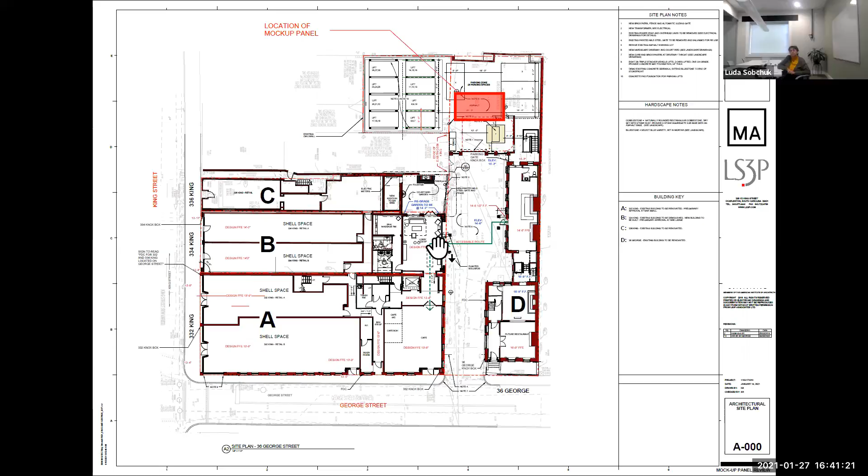I'm an architect with LS3P, speaking on behalf of the owners of the property, and yes, Mashburn Construction is the contractor that has built the mock-up. There are multiple buildings associated with this development, and we are specifically going to look at the brick facades that occur right where the cursor is, which is the back of 334 King Street. The brick also wraps around the north facade as well.

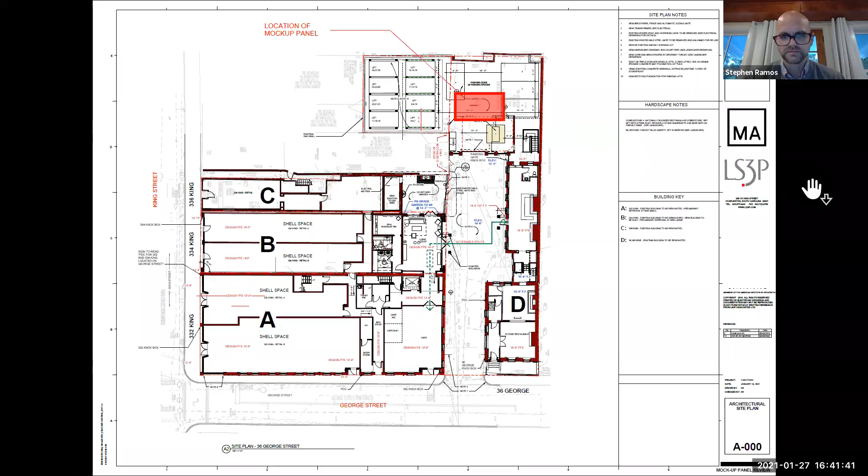The mock-up is located where that red rectangle is on this drawing. This is the segment of facade that the mock-up represents. It is a brick facade. There is a wood storefront, which is the entrance to the lobby at the ground floor, and then there are steel doors above that. Those 8 openings are actually steel Juliet balcony doors that swing into the building, and there are also mild steel railings right at those doors as well. The building on the left that you see is an existing historic building.

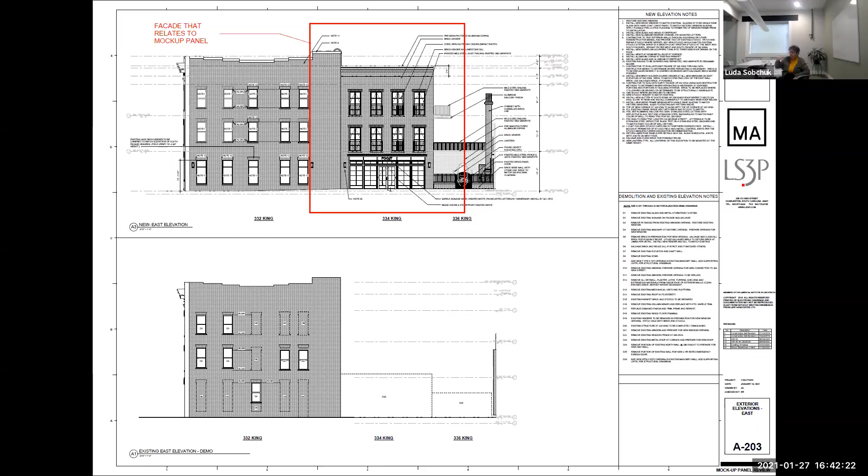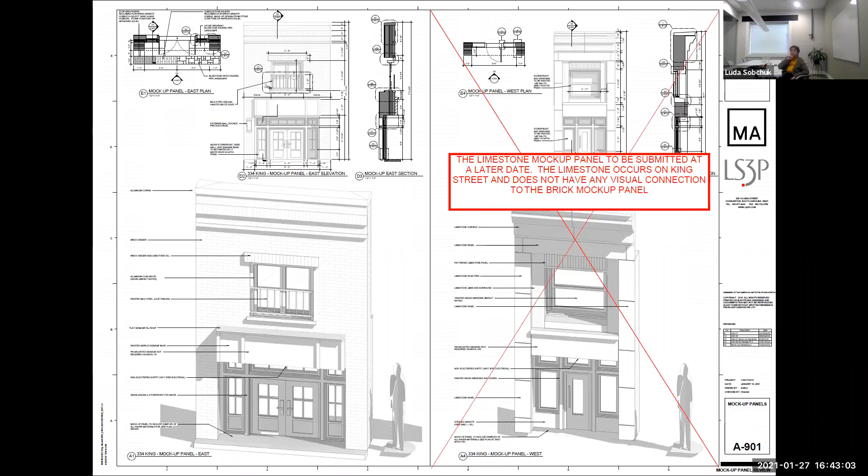You've got the detail through the parapet on the bottom left. You've also got a jamb detail at the storefront.

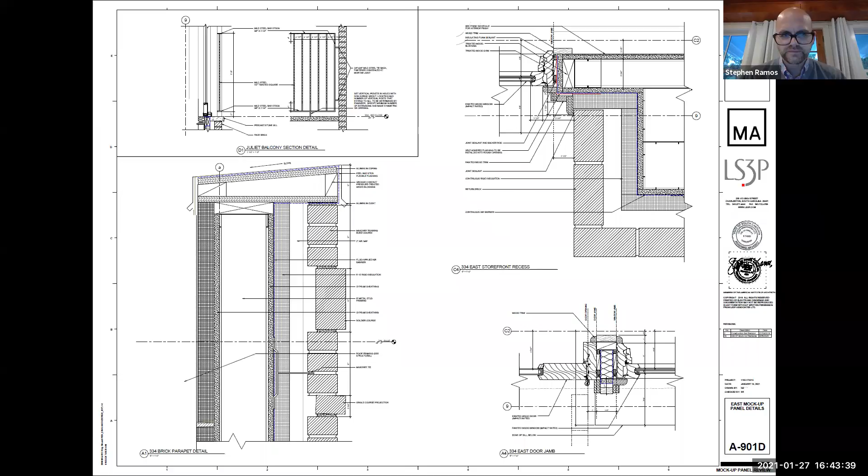Next, here's a photograph of the actual model.

Just again, brick facade. You've got a wood storefront, and then what looks like a window is actually operable doors. Believe it or not, there's an astragal right in the middle, but they are operable little doors that swing inboard. And then you've got a little copper roof right above the signage band.

I want to point out there are a couple things we are going to continue to look at. The way the railing connects, we weren't overly happy with. Right now it connects to the jamb of the brick. We're going to look at having some steel tabs that go back into the jamb of the wall to give a better surface for those railings to weld to. So that's just a little detail that we're going to take another shot at.

I wanted you guys to be aware of that. Another one is the actual signage band. Right now, this image shows it's just a flush piece of sapele that's painted. We can't get a piece that's big enough to stretch the entire length of the facade, so we've designed for there to be battens on that signage band.

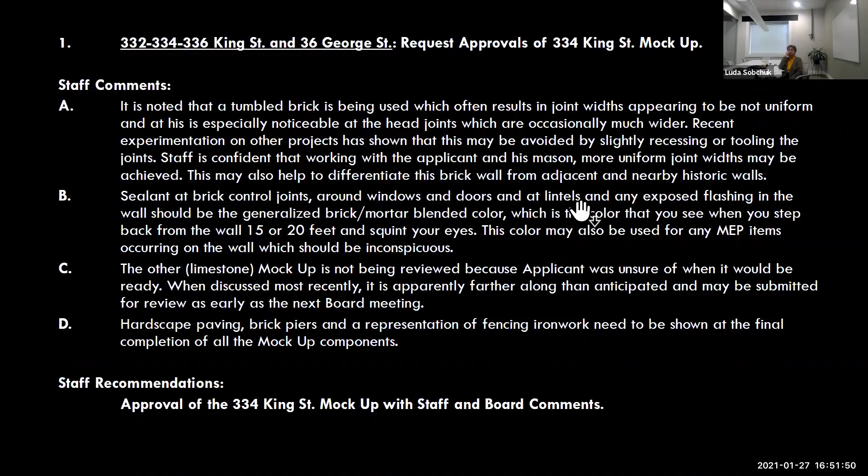Okay, thank you, Mr. Courtney. Any staff, or sorry, applicant clarification? No, that was clear, thank you. Oh okay, great. All right, board discussion or a motion?

This is Leon Scott. I'd like to make a motion for approval of the 334 King Street mock-up with staff and board comments.

Can I make a comment beforehand? Maybe because we haven't had any board comments yet. Maybe. Yeah, I think I would be on the same page with you, Leon. I just wanted to mention that the only two questions I actually had for Steve were regarding the railing and regarding the two battens that you had.

Thanks for the clarification already. It was drawn as a nice detail, the railing attachment, but it seemed to have missed the mortar joint a little bit, so your suggestion sounds good. I think it would be good to see. Generally, all the materials are of good quality and nice craftsmanship. It's generally a nice building. I thought the battens as well, if you have a horizontal batten or if those battens continue at the soffit -- I don't know how you treat the soffit. There should be a finished touch, and I like your suggestion there as well, Steve.

In terms of, I think city staff has mentioned that only a portion of the mock-up is being proposed here, and typically the board doesn't like to approve partial mock-ups, but I think in this case it is acceptable because it's two different facades, basically two different buildings. So that's all the comments I had. It looks good, thank you.

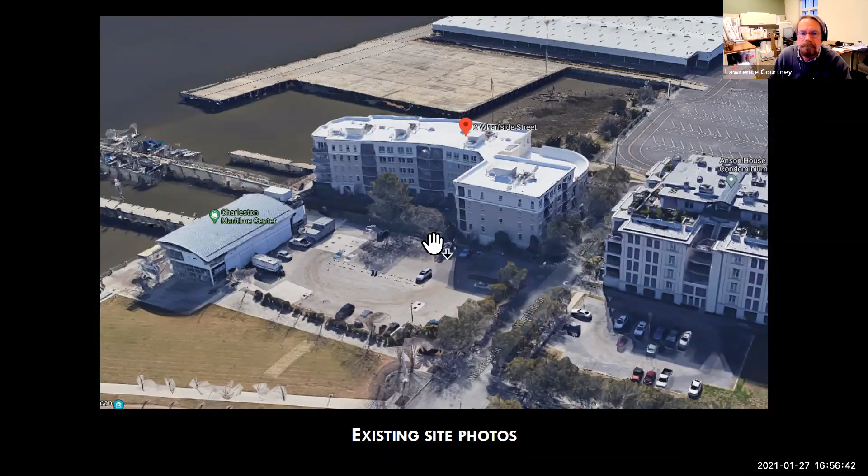Mainly where they're interested in replacing operable with inoperable windows are at stair towers around the complex, and mainly on this east facade right here on the harbor. This is a view from the north.

Board comments at final included: one board member said that they appreciated details on the plans, and one said that they don't think that the window is clunky -- if it's heavy, it will add to the substance of the building.

Staff comments at that time were that this is essentially an in-kind replacement of the project, addressing the remediation of water intrusion issues, and that care is to be taken to maintain profiles to match existing, and that the window looks very clunky in the photo, and that the applicants should seek an alternative which better matches the existing. Staff's recommendation at that time was for final approval with board and staff comments, with final review by staff.

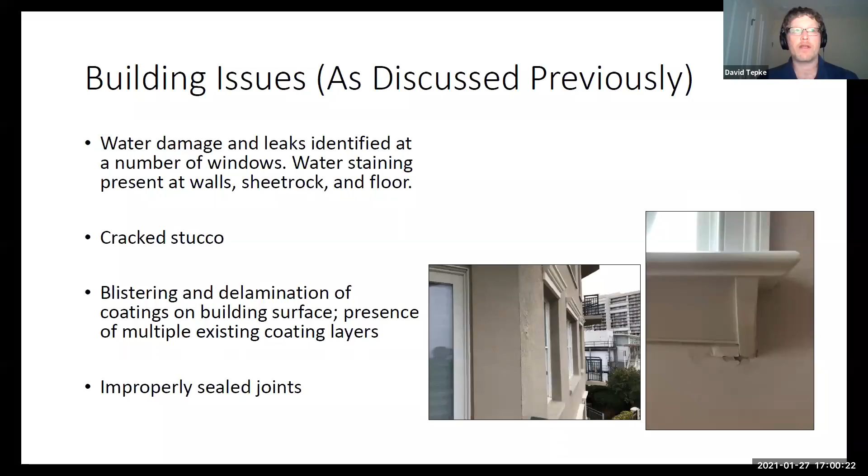to the board prior, and there was some comments regarding some trim that would make it more architecturally feasible. And so we switched to a YKK model. Skip to the next, please.

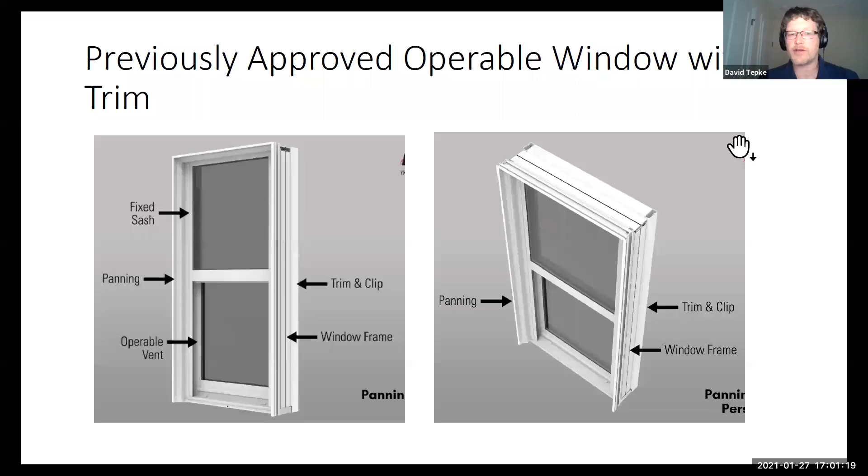And so this was the previously approved operable window at staff level with trim. And as you can notice, it's a single hung window. Skip to the next, please.

However, the subject of this request is that the owners have requested that we move to inoperable windows, as Mr. Courtney has mentioned, at essentially the stair locations and the eastern facing balconies and window walls. These are inoperable units of the same essential manufacturer with the same coatings, the same grade of window, and the data sheet has been provided as part of the presentation and the request.

Next, please. So this, as you can see, the primary difference between the inoperable and the operable window is the sight line at the center of the window, where essentially there's no offset. Next slide, please.

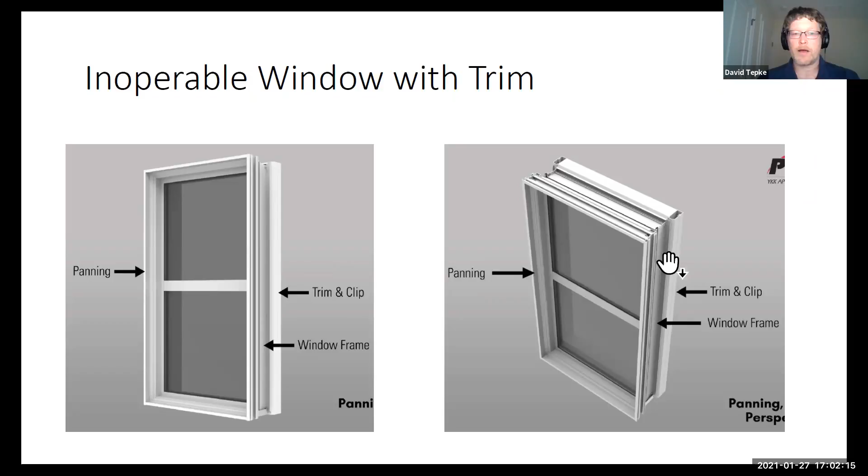The locations that this is being requested is at the stair towers, which I have highlighted there on the drawings on the left and in photo on the right. And this is on the west elevation, which is the street facing elevation.

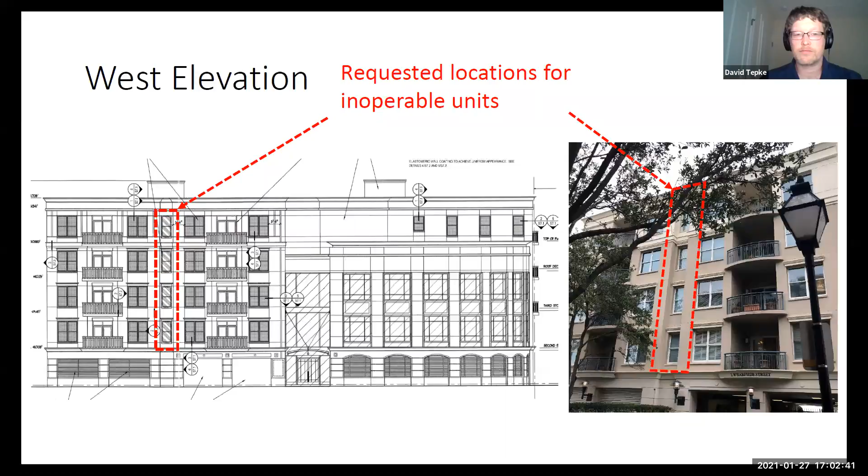Next. Next photo, please. Okay, there are no requested areas on the north elevation because there are no stairs.

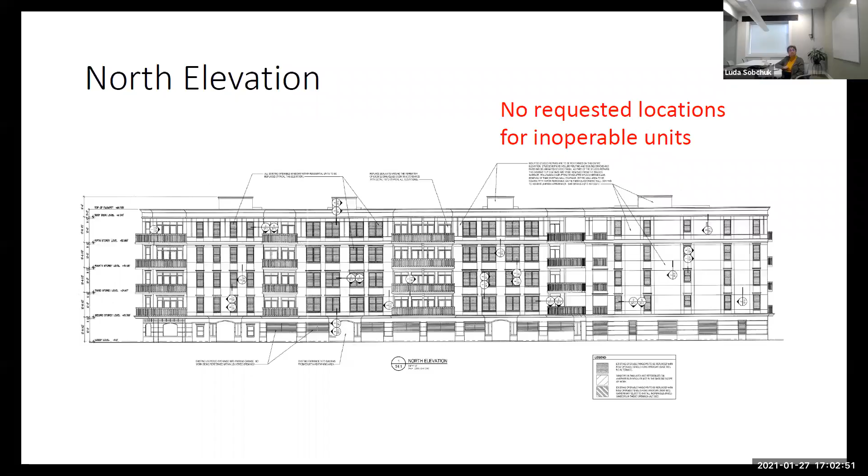Next. The south elevation has 3 locations similar to the one shown in the picture above the drawing details.

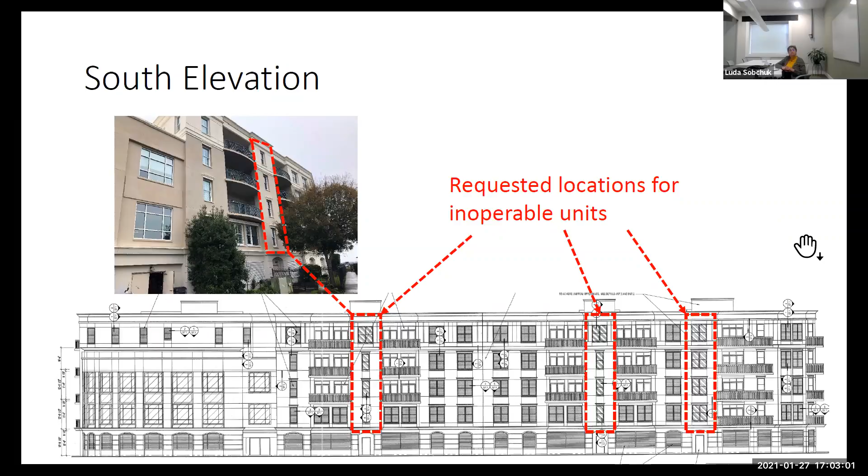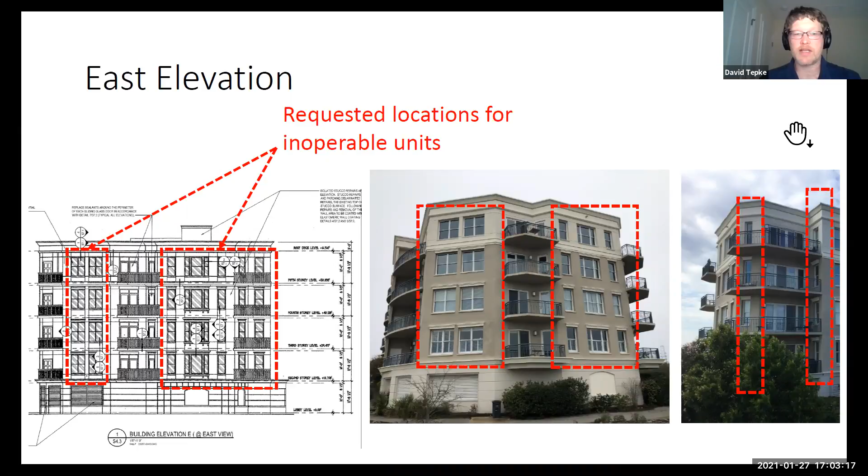Next. And then on the east face, which faces the harbor, the request is to replace the operable windows that were previously accepted and discussed and modified on staff level with the inoperable.

Thank you. Any questions from the board or staff? I have one. I was sort of curious - what predicates this request? Is it maintenance driven or financial, or what would you say?

Primarily maintenance driven. There is a desire to have essentially less operable parts, particularly on those east facing elevations closest to the harbor there. We were also able to obtain a higher performance rating on the inoperable window compared to the single hung. They have a higher overall rating, structural and water resistance, and that appealed to the owners.

Okay, I have one question. For the fixed, non-operable window that you see on the right, is that an internal divider, or is it a simulated divided light? Is it external?

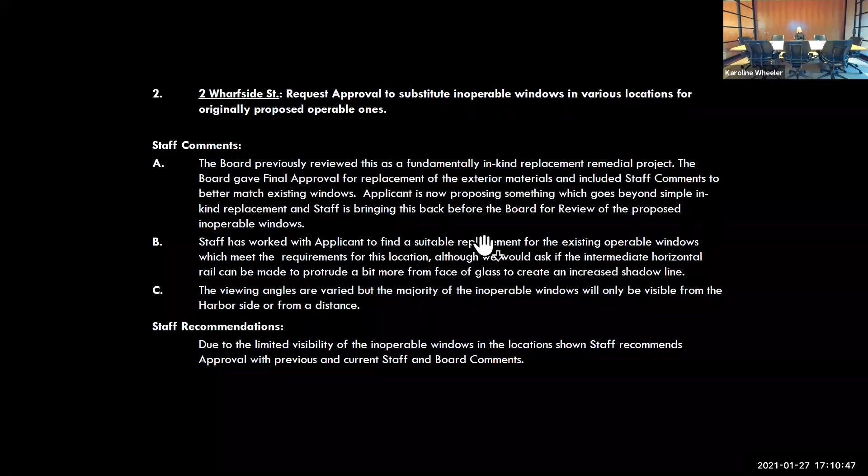Staff comments include that the board previously reviewed this as a fundamentally in-kind replacement remedial project. The board gave final approval for replacement of the exterior materials and included staff comments to better match existing windows. Applicant is now proposing something which goes beyond simple in-kind replacement, and staff is bringing this back before the board for review of the proposed inoperable windows.

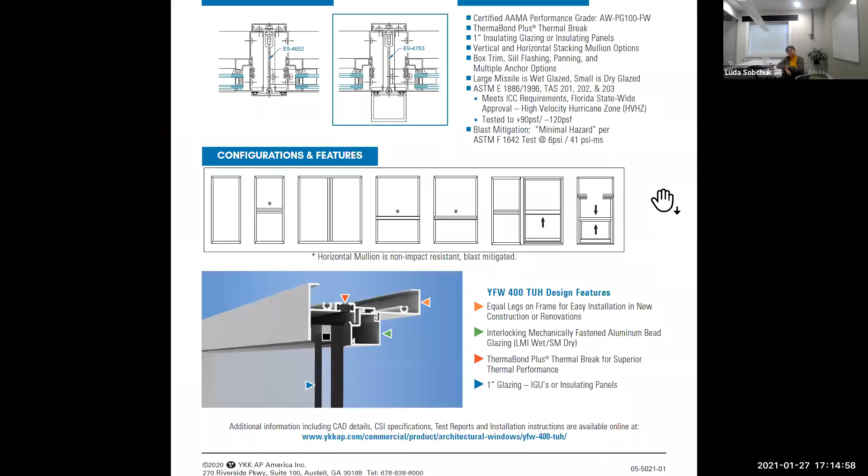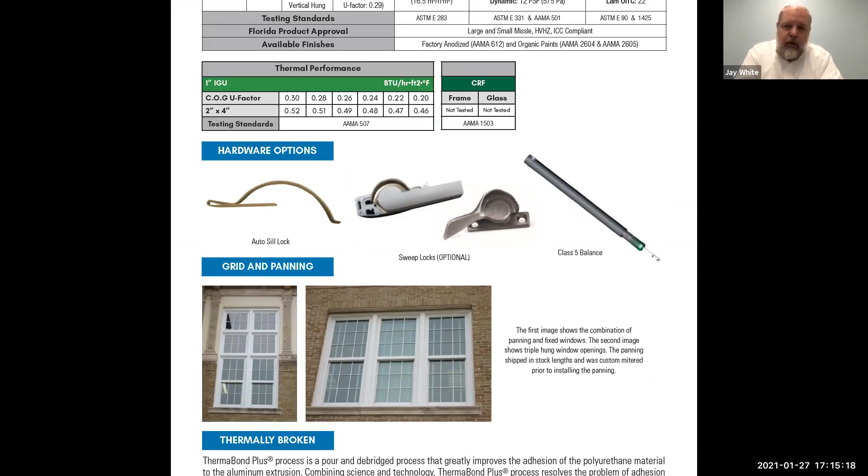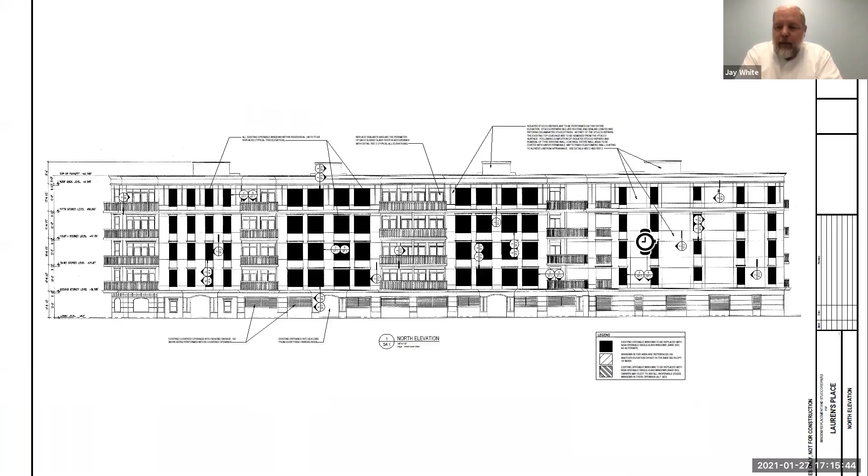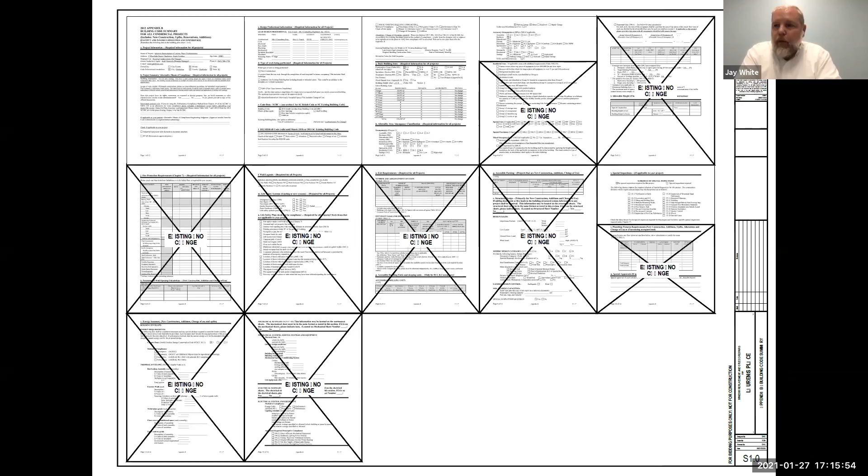Well, I can sort of lead this one off a little bit. I understand, for a homeowner to be going through such invasive surgery on their house to rectify a condition like this, I understand wanting to maximize one's investment. My only concern is that moving to a fully fixed window, whether it's a truly divided light or a simulated one, does flatten the window significantly without the offset of the sashes. And considering that you've got these two window types nearly side by side, despite the fact that most of them face the harbor, I'm a little concerned about that. Charleston has always been known for the way its buildings meet the rivers, meet the harbor, and I don't want this project to have the effect of flattening the facade even greater. So that's a concern for me.

I would think that you could improve on an already fantastic window by fixing that sash entirely, and that would especially make sense in the stairwells where there's nobody monitoring whether the windows are open or not. But I would think that the AW65 performance, if that's what the adjoining or adjacent windows are providing, then armoring this facade is not really going to protect the building as a whole. I think it has a detrimental effect on the in-kind replacement that we approved back in September.

I'll just add a little bit, I wasn't at the September meeting so this is the first time I see this. I definitely agree with you, Jay, that suddenly changing the window from one elevation to another just because it faces the harbor doesn't really make sense to me. When I looked at the elevations, the proposal of changing the window type in the stairwells would make sense because it's recessed, and there's a certain system or concept behind that. But the facade at the harbor is still visible, and I don't see a reason for that, especially if the new window would still be a high performance window.

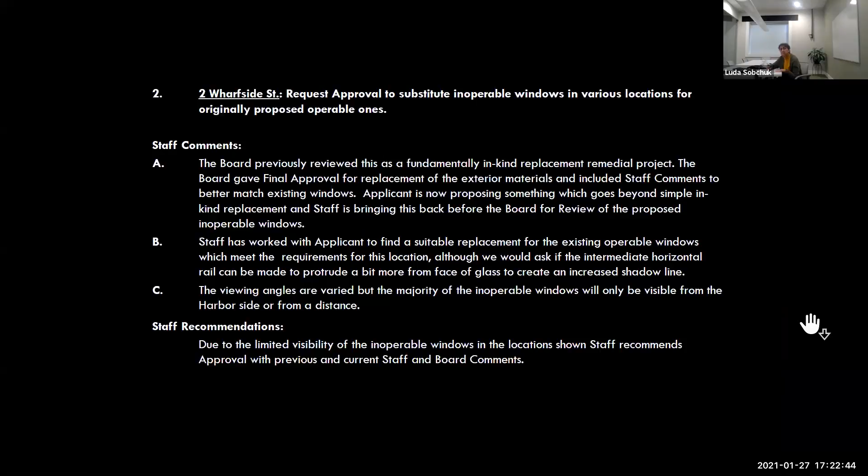The third and last item on the agenda is 20 Romney, involving 4 buildings at Foundry Point. The applicant is requesting approval to paint buildings 1, 3, 4, and 5 at the Foundry Point complex.

This is not rated, it's brand new. It's in no discernible neighborhood. It's circa last year or the year before, and it is in the historic corridor district.

It at first was known as Charleston Steel Phase 1.

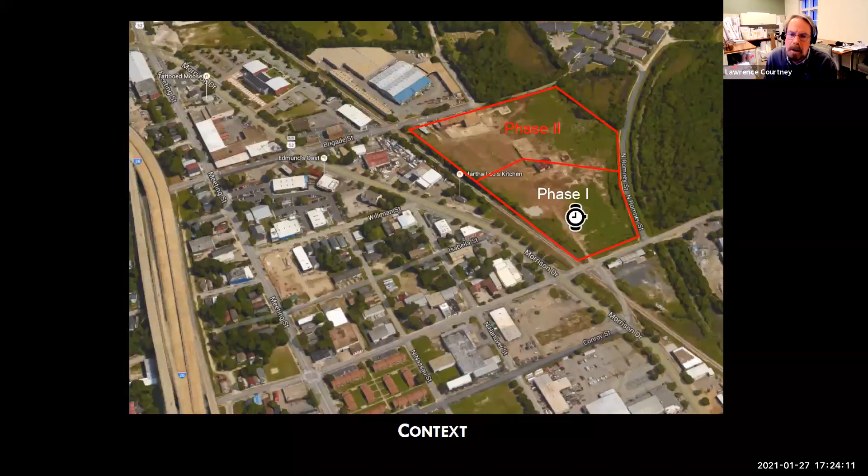And with that, I will turn it over to Mr. Monroe and his team. Lawrence asked me to have the ownership team, Middle Street Partners, Adam Monroe, and our consulting engineer, Dean Rolita, to talk a little bit about why this request is being made, and then I'll follow up with the how. So I'll turn it over to Adam.

Sounds good. Can you guys hear me? I'm not seeing myself on the Zoom here. Yes, we see you and hear you. We see you. Okay, all right. Nice ceiling fan. Yeah, I had to go hide in my house to take this.

Appreciate everyone's time and consideration of this agenda item. By way of background, this project was constructed in 2019, late 2019, through spring of 2020. I think we finished construction on the last building there on Romney Street sometime around April of 2020. And some background as to what is behind this request.

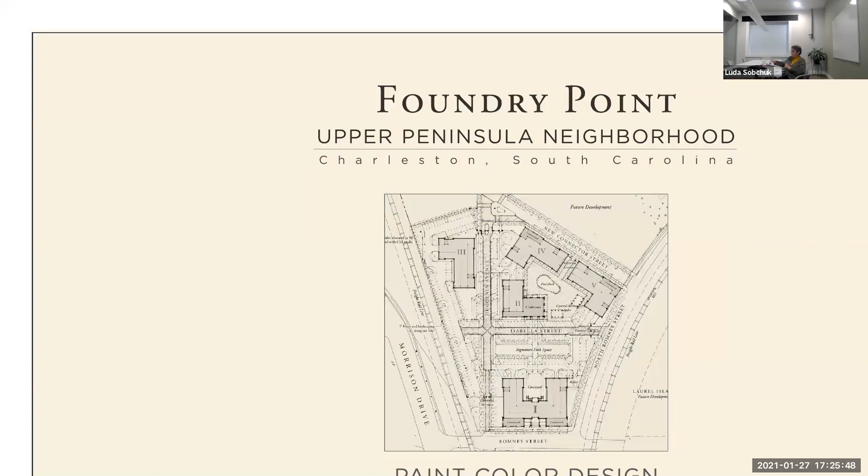In spring of last year, we became aware of some issues with the buildings related to the through-wall scuppers in the roofs having a defect. Basically, there was no welded seam along the entire run of the scuppers, which several large rain events revealed a pretty large bulk water issue for the buildings, putting a lot of bulk water down between both sides of the exterior sheathing, but really on the exterior side, between the wall and the brick.

We were lucky to find that issue quickly, determine what the remedy was, and go back and replace 30 some odd scuppers throughout the project over the course of several weeks. In doing so, we had several consultants review the remedial work and found another issue after closing the chapter on that.

Which was not a fun way to end one issue, but we did discover some things that we wanted to look at further. That being the integrity of the wall system relative to the damage sustained by these bulk water issues caused by the scuppers.

To make a long story short, we engaged a building envelope consultant who reviewed the condition that we were seeing as we put these buildings back together after the initial issue, and wanted to ensure that we had our bases covered as it relates to long-term durability and waterproofing of the wall system. So that's why we're here.

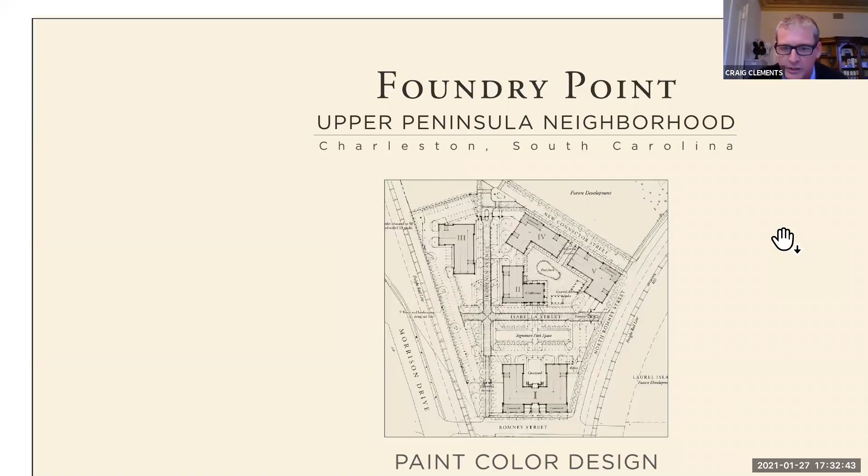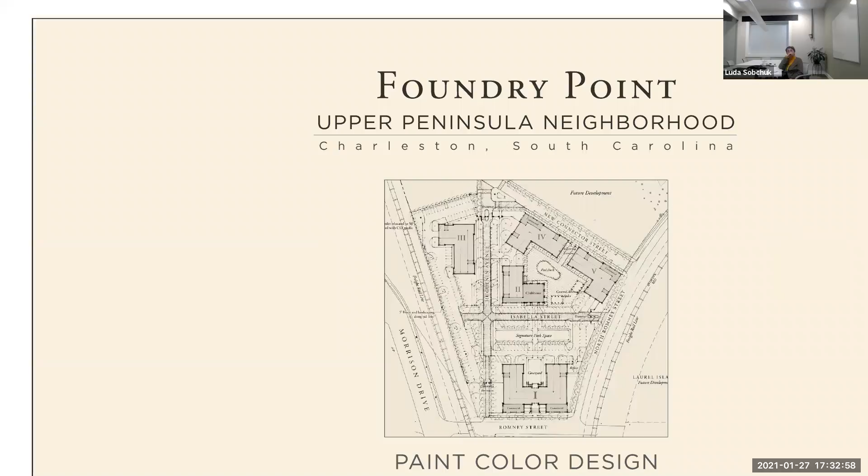There's one strain of thought that says, well, building 1 is just painted white, so just paint them all white. But we felt that was probably not the right solution. So we experimented with a whole lot of visual studies of different color schemes, and the one you have before you is the one where we ended up. I can run through it briefly for you.

Lawrence, if you would advance me to building 1. And there we go. So this is the color scheme for building 1. As you can see, these are all related neutral colors that work in the same general bandwidth, but some tend more warm, some more cool, some more red.

The one for building 1, as you can see, we have a whiter accent color inside the space around the pilaster, or the space around the larger openings, and that's in keeping with the original concept for the building, where that was a lighter color. But we decided to lighten the whole building up. We felt that, because of this building's size, this was actually an improvement from the darker color scheme it has now.

What isn't clear, and I apologize for that in our presentation, is that this building has bookends, as you can see, and then an infill space in the middle. That infill space is envisioned as having the same color as the main body color, but double the pigment, so those in-between sections recede a little and are a bit darker, while the bookends are a little lighter. Then we have another slightly lighter color for the pilasters at either side of the large openings. Next.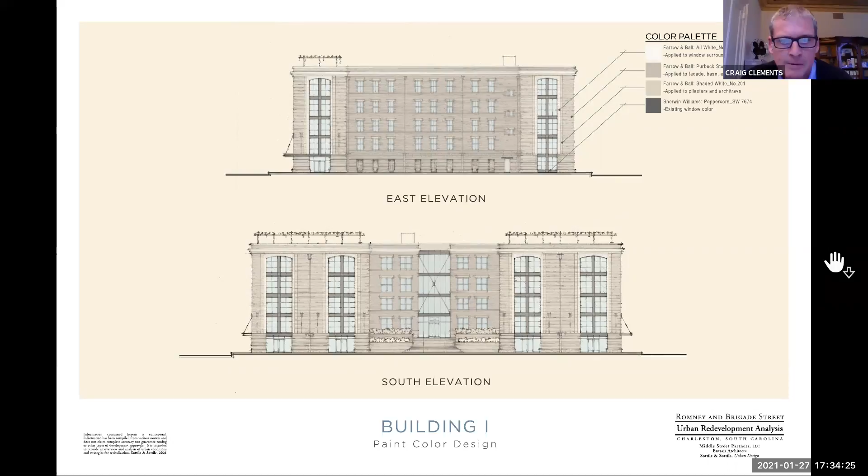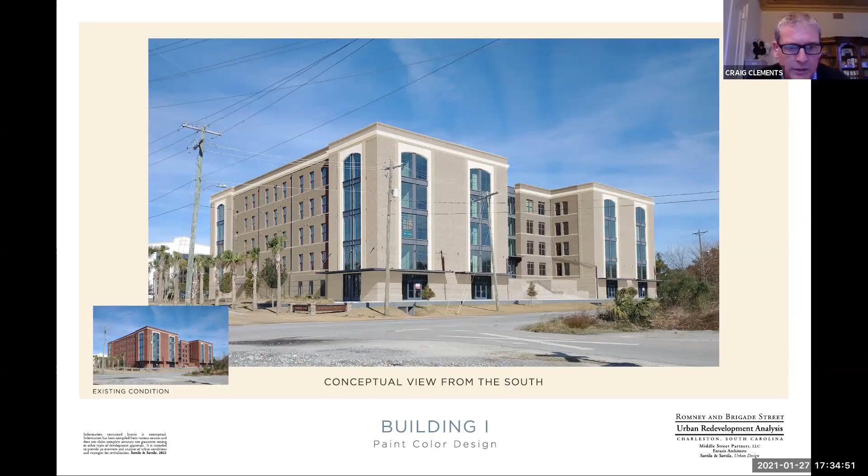Next, it's building 3, the building with the large arch. We had the option in arranging this color scheme to either paint or not paint the bases of the buildings, because the bases are solid masonry construction. That's where the podium is, so the weep is above the base.

So that's the option we took with this building. Again, in all cases, the channeling and the windows remain the same color. We have a body color and a slightly darker accent color for the arch, the cornice, and the heads over the windows.

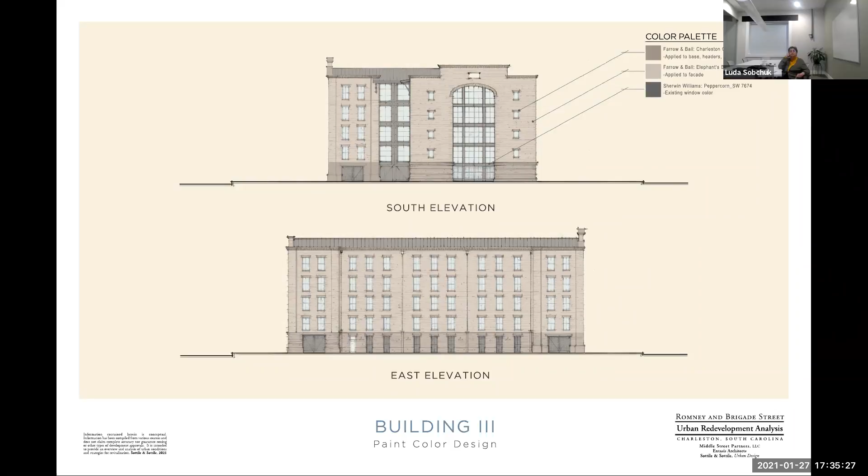Building 4, I should say building 4 and 5 are identical. They are just opposite mirror images of one another, but we decided to opt to paint them 2 different colors just to push the diversity of the palette a little bit further. So this is the color scheme for building 4.

Again, you've got in this case a darker body color and a lighter accent for the arches and window heads. And again, in this particular case, we are leaving the base unpainted. There's a photo simulation on the next page.

Oh, actually back up one, because I guess we did building... yeah. So then, building 5, which has a much warmer, reddish tinted neutral color for the body and a lighter color for the arches. And again, the base on that building will remain unpainted.

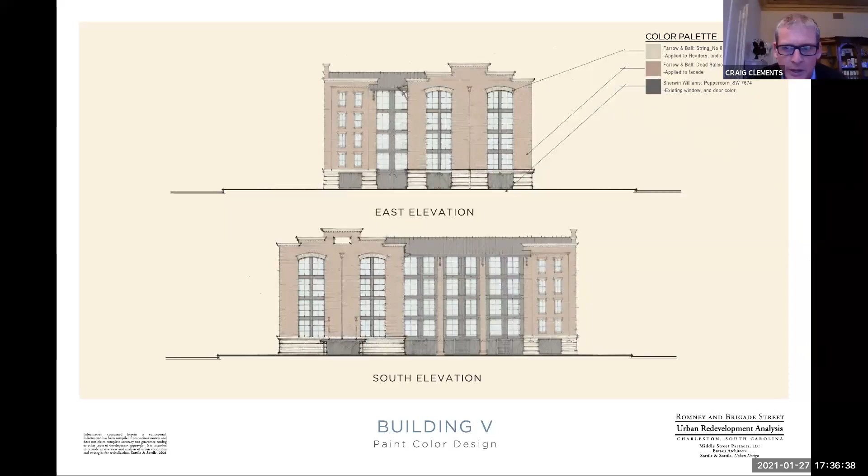I should say it was built to kind of feel like an evolutionary project, like an industrial site that had been re-inhabited. And we did take a close look at some of the buildings in the Navy Yard that are painted brick and painted stucco to get some ideas about these color schemes.

Okay, great. Any questions from the board or staff?

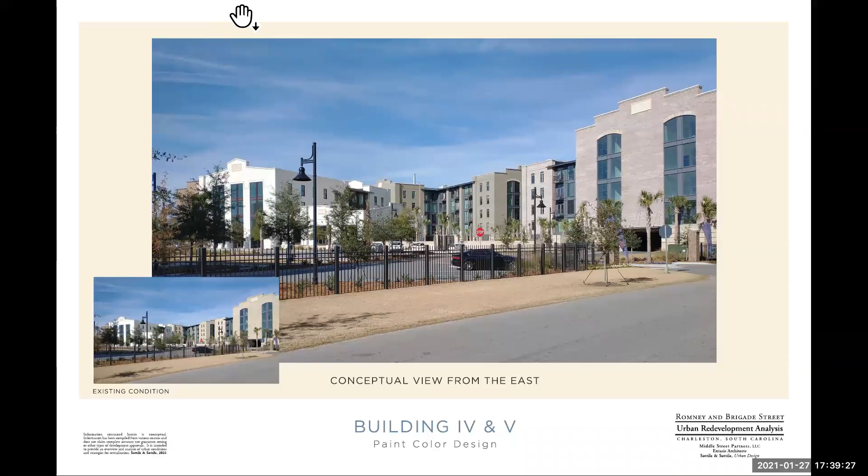Yeah, Dean can speak to that, but we investigated building 2 just as a control, the white building there, and it was day and night different in terms of the findings. So the paint appears to be a very good barrier in this instance.

Yeah, if I may, the key is that building 2 has the same weather resistant barrier. It has the same mortar in the cavity, and just the performance is night and day. And that really is what creates the opportunity here.

Well, I should also mention that the scupper leaks talked about earlier are going to necessitate several veneer removals from the scupper down to the podium. So there's going to be some scarring on the buildings, and that's just another factor in the decision to paint them. I'm not sure we'll ever get it put back exactly where there's no trace of those repairs.

Well, I have a host of questions, but they're all building science related and really beyond the purview of the board. It's really unfortunate that y'all got here, but I'm curious, and this is only marginally germane, but was the brick itself ever studied to see if it met specification?

I can speak to that. I did not do any testing of the brick, but I've been pulling brick masonry apart for a long time, 40 years. There's nothing about this brick masonry, other than the mortar in the cavity, that would cause me to spend owner's money doing tests. There is no issue with the brick masonry. Water doesn't get through it quickly—it takes an hour or so for water to get through it, which is what you'd expect for a well-built assembly. There's just nothing that caused me to see it as an issue, or I would have pursued that, but it's a great question.

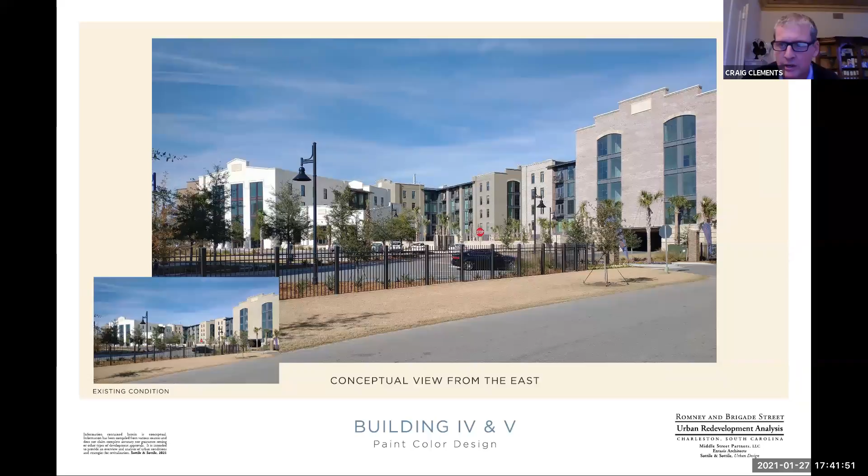Okay, well, so the paint that you're specifying, is it just acrylic house paint? Like what is it? Is it a masonry coating specifically? Building 1, I believe, if we're using that same spec, is just exterior paint, designed for brick, designed for masonry. So it's not exotic.

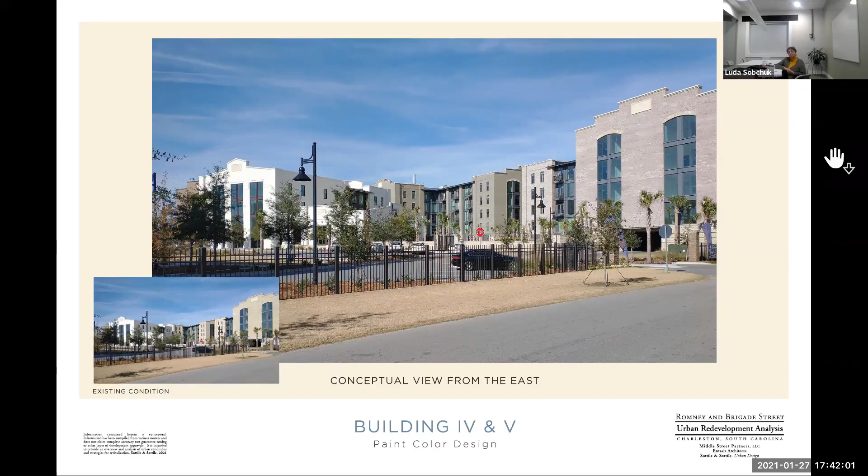All right. I mean, like I said, I have a million questions, but they're for another day. Any other questions from the board?

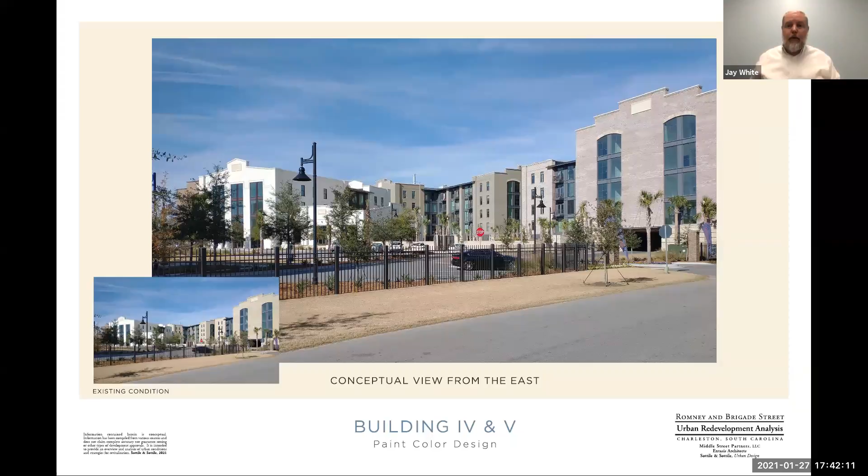Okay, we have no public comment, so let's proceed to the city staff recommendation. Okay, thank you, Mr. White.

Staff comments include: although it is still somewhat unclear as to what has caused the water intrusion issues, staff has been assured that the applicant has explored and exhausted all means of addressing these issues and proposes this painting as a last resort. And while painting brick is generally not viewed by staff as a good idea, staff acknowledges that what is being proposed is not simply a cheap fix, but is in fact a costly effort to remediate issues while preserving the originally proposed aesthetic of the development. Staff has no concerns about the proposed color palettes either.

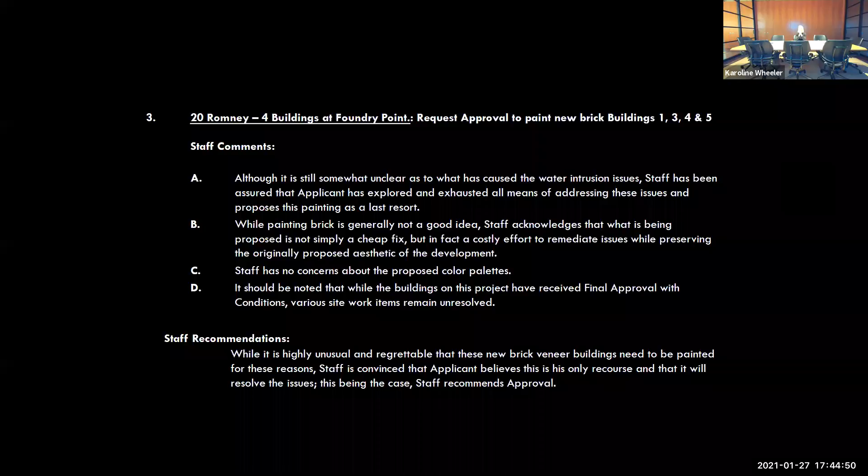Okay, thank you, Mr. Cordy. Applicant's clarification? No, none. Okay, great. All right, so board discussion.

This is John Robinson. I would just agree with staff comments, and I share the chairman's concerns about how we got here. But I do believe, as staff has said, that this is the best and—expensive, costly, and after due diligence—the best outcome possible to resolve the issue of the longevity of this building through aesthetic change. So I would support it.

This is Leon Scott. I'm in agreement as well with staff comments and recommendations.

This is Karoline Wheeler. I'm not sure if that's really the best way to move forward, because I would be concerned that you would trap moisture now even more between the exterior paint layer and the water resistive barrier. Because typically the brick is porous and water can get out of the building, but now you still have a cavity. So I don't know if this is just a temporary fix, and you might have to get back in a couple of years and take the brick veneer down anyways. I'm not too knowledgeable about that, but there would be a concern that it doesn't seem like a real fix, a proper fix.

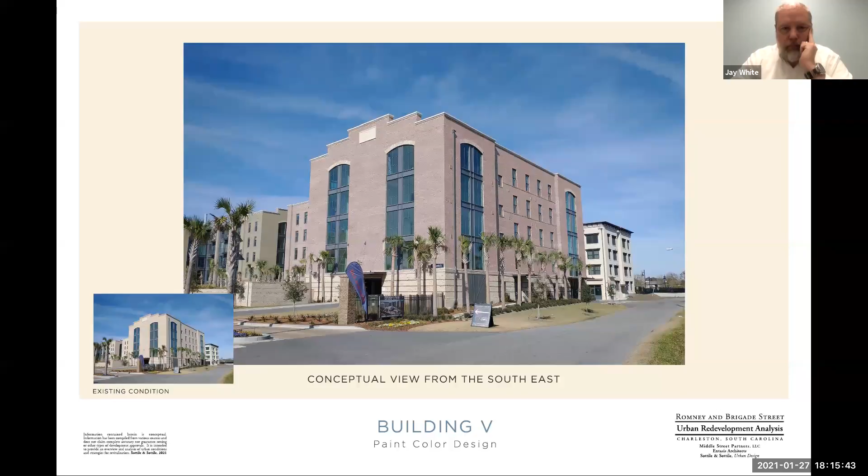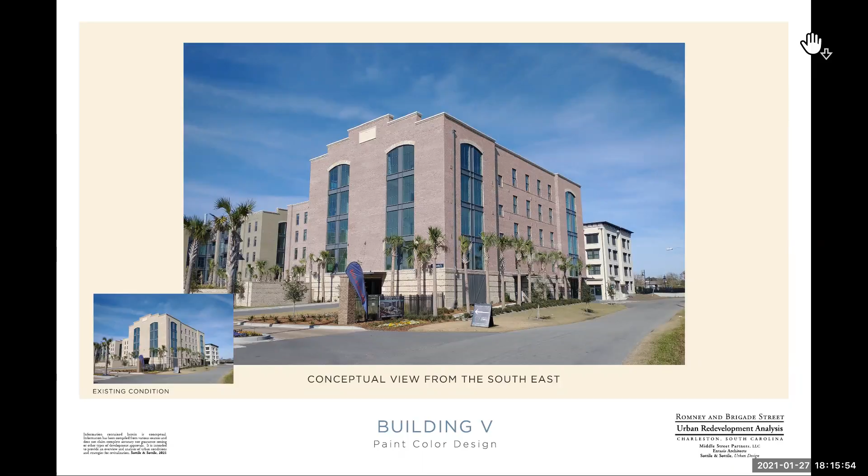Or are you about to hit send on it right now? No, no, no, no, no, no. I would expect it by the middle of next week. Okay, right. That's very reasonable. I think having something in writing to put in front of us, yeah, we can get some consensus from, or some edits pretty quickly, and get that turned around.